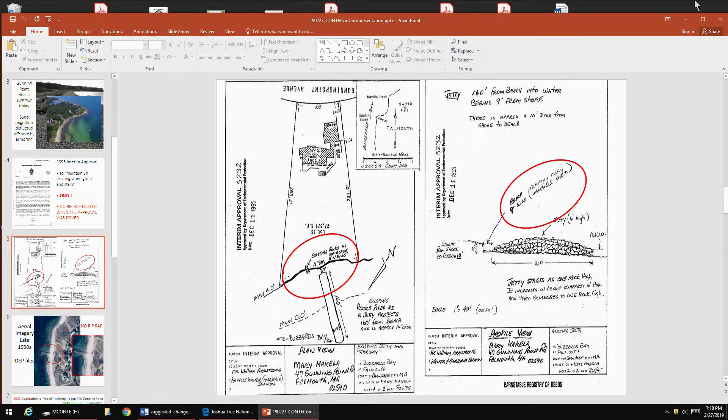If you look at the plans associated with that approval, you see a 160-foot groin and some existing rocks, giving the dimensions for a stone staircase. The plan shows the toe of that groin starts about 9 feet from a coastal bank, specifically noting intertidal, natural shore with a 10-foot bank, and it also notes the height of that jetty.

Here's the aerial imagery. I don't have the exact date, but if we look at the close-up, you can see old degraded riprap up on top, and then it turns into a rocky but natural beach area. This natural beach area extends all the way down to Flume Pond.

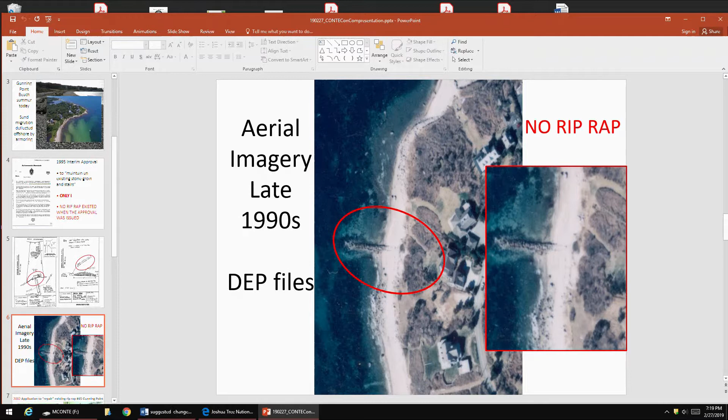In 2002, there was an application to repair the riprap on the adjacent property. There was some degraded riprap, though the existing conditions plan doesn't really show it. What's interesting about this plan is it says beach grass not to be disturbed during construction, again pretty indicative that there wasn't any riprap there.

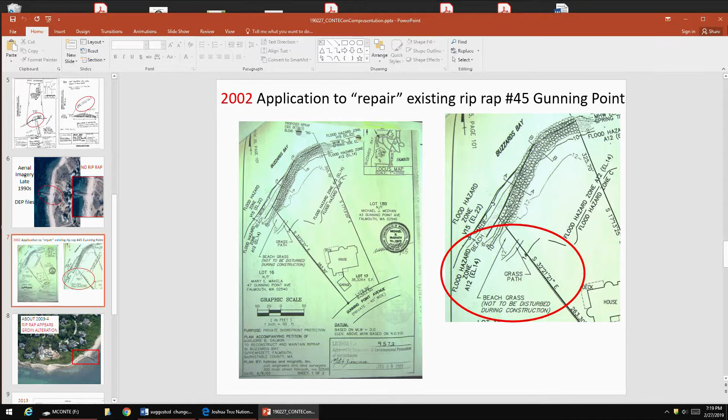What happened around 2003-2004 is this McCready mansion here had just completed riprap all along here, and they were starting other work, getting it permitted after the fact. Here's almost like a seawall going all the way here, and now during that construction it extends right into this area that never had anything.

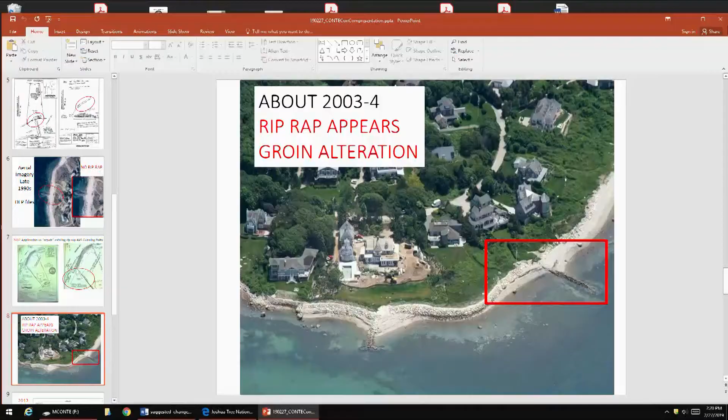We also see this groin, which started off, now extending landward. Later, around 2013, a plan was prepared for Salt Pond because they became the owner of all this coastal access property, which the Sippowisset subdivision has access to. Here's that plan, showing the area with the groin.

What you can see now is the groin, and during this plan you can see all the riprap - they even started riprapping down into here. There's this riprap extension, a change in the configuration of the steps, and an extension of the groin all the way to the toe of the riprap.

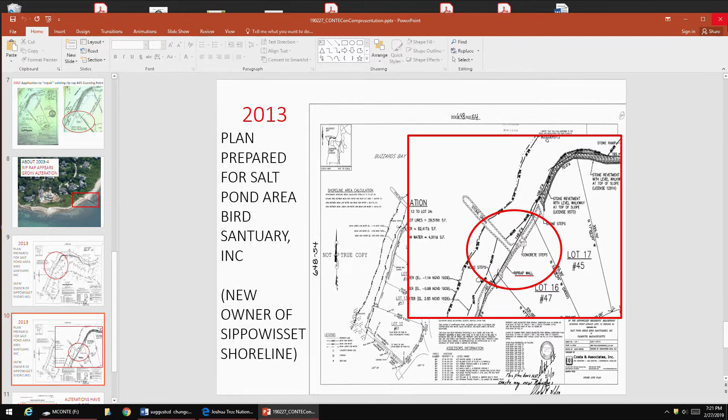The important thing is those alterations actually void the 1995 interim approval, specifically because the standard conditions say in paragraph 2 that any structural alteration requires a waterways license, and most importantly, any unauthorized structural alteration shall render the interim approval void. So not only was there no riprap, but because of alteration of the structures themselves, they voided the interim approval - there's basically no approval for anything on this property now.

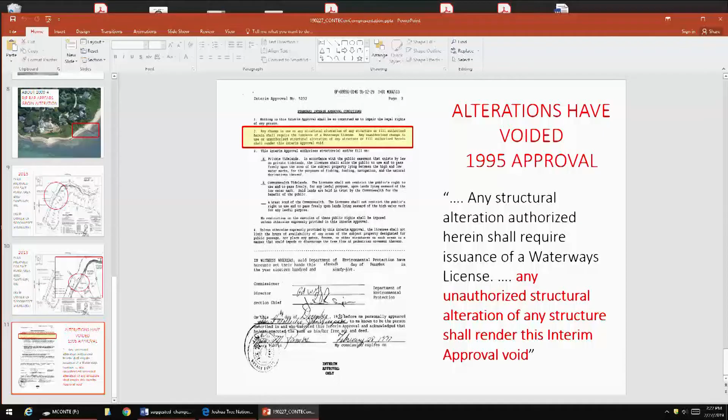I would ask that the Concom could help our neighborhood and the town of Falmouth by asking the new owner of this property to remove these structures and let this area start to revert back to a natural condition. So that's my presentation.

Thank you. Thank you. Anyone else?

Mr. Chairman, I just want to make an observation that normally, in past years, I've been on this board since 2003, when a presentation for an RDA is going to take more than 5 minutes, maybe it's the wrong place to hear this. So we should think about that. Duly noted. Thank you.

Michael Eder, I live on Gunning Point. One thing I wanted to point out is I think you have a number of letters from at least 3 long-term residents attesting that that wall did not exist prior to 2002. While I didn't stand there and watch the wall get built, we know that there was a major wall construction.

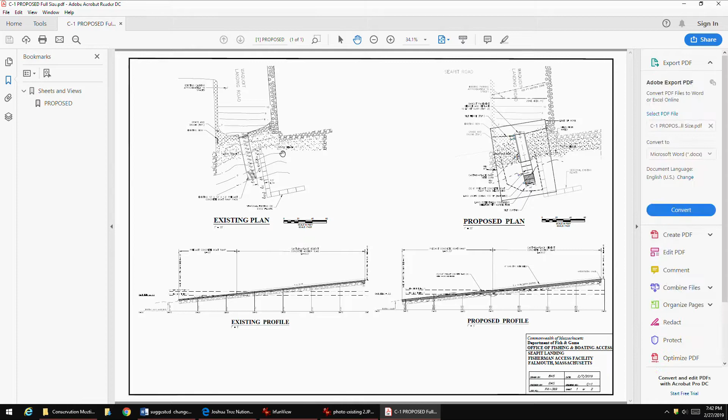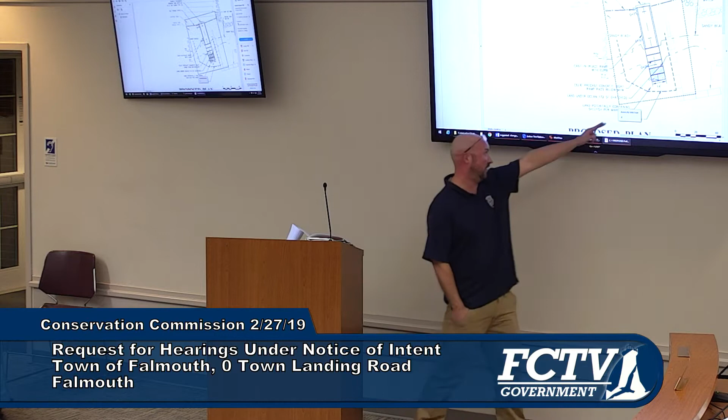So here's the boat ramp right here. There is land under ocean. We spoke with Marine Fish. The ramp will be extended by 4 feet, and widened by 6 inches on each side. The actual clear path will remain 12 feet. The 6-inch curbs will become 1-foot curbs, so the ramp will actually be 14 feet instead of the 13 feet existing. The land under the ocean, the ramp will be extended by 4 feet. The actual existing pads, which are 1.5-foot precast, will be made into 6-foot pads. The reason we do this is it seems to last longer, and grouping them gives more traction.

The extension, the 4 feet we're extending into it, is unfortunately in a shellfish area. So for that, speaking with Marine Fish, mitigation will be required. That's 4 feet by 14, for 56 feet. The time-of-year restriction for Marine Fish would also be from January to approximately May. A silt curtain will be used and would have to be installed prior to that date.

For that reason, we're not proposing to extend it beyond that. We want to keep it almost as is, with as little change as possible. So we're basically keeping the same footprint, other than extending the curbs and the actual ramp by 4 feet. That's just to give it a bit more room to reduce the big prop wash hole at the bottom. So what we want to do is extend it so there's not as big of a prop wash hole.

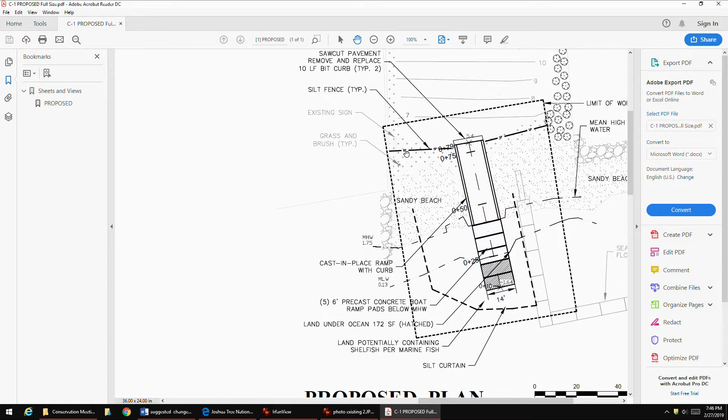Yeah, no problem. Other than that, we have used cofferdams in the past. It usually comes up. With this ramp right here, at low tide there's 2 feet, so a contractor would be working in knee depth. So what we did is we proposed a silt curtain that goes all the way to the bottom.

And what that is, it's ballast, they'll anchor it. That seems to keep sedimentation within it.

The reason we don't really want to do a cofferdam: for one, there's not that much water. Two, you're really changing the footprint on it. So when you extend that footprint into an area that contains shellfish and other things, it requires more mitigation, and there's really not much to gain in this instance.

Megansett Harbor, like I said, had a lot bigger than the 1-foot tide change, and that was done underwater. Harrington Street too, so we have done that in the past.

The total ramp length right now, we're looking at 65 feet. It's going to change to 69 feet. That's the 4 feet that I talked about.

The width, 13 feet, it's going to change to 14 feet. That's going to include a little bit of extra bank work, so you're going to extend into the bank 6 inches each side.

No salt marsh was observed. You have some brush and grass in the area, but nothing else was observed, and the silt fence is right above that area. No pavement is proposed at this time.

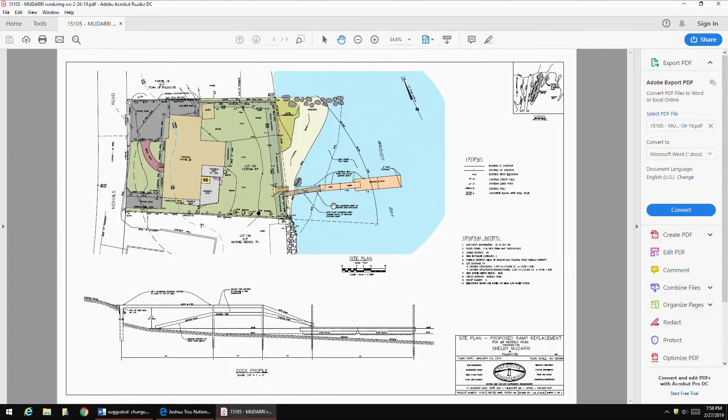This property may be familiar to you; it's been before you on a couple of occasions. Most recently, we obtained permission to rebuild the existing concrete retaining wall with a new vinyl sheet piling retaining wall, which was installed, inspected by staff, and issued a certificate of compliance. You may also remember we were before you about a year ago, plus or minus, attempting to get permission to rebuild the pre-existing seasonal ramp, walkway, and floats.

We were not successful in getting permission to do that. We reconsidered and asked for a modification of that application to allow basically what we're here for tonight again, but a lot of things have changed since the last time. So with that, I'll just go through the project.

The Mudarris own the property at Lot 148. There's a single-family dwelling and typical appurtenances on the property. They do have the benefit of an order of conditions for a seasonal dock, which received a certificate of compliance very recently. There was some controversy over its licensing about a year ago—some neighbors challenged the Chapter 91 license, suggesting it had become null and void. But ultimately, the DEP, through the Division of Wetlands and Waterways Office and Mr. David Hill, found in favor of Mr. and Mrs. Mudarri and upheld the original Chapter 91 license. So as far as we know, there are no outstanding matters of compliance or licensing with anything on this property as I stand here tonight.

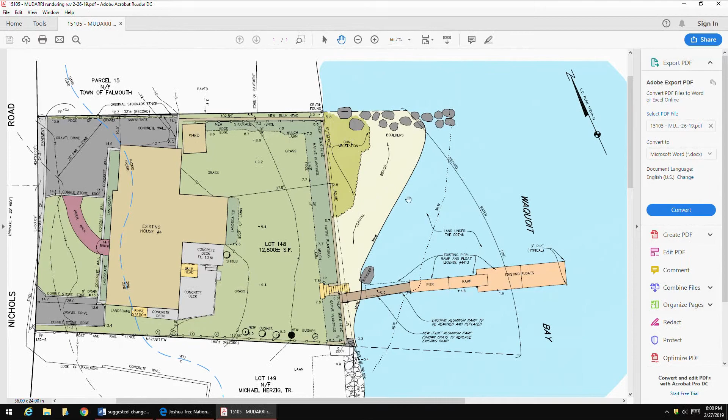I want to make clear the focus of this project is basically where I'm trying to circle with the mouse right here. You'll see a dashed line representing a portion of the licensed seasonal dock—a ramp that leads from this fixed walkway, slopes down, and lands on the beach in this location. Currently, to use this seasonal ramp and float, the applicant has to walk down this set of stairs onto the beach, sometimes through the water during higher tides, onto the base of this aluminum ramp, which grows seaweed and is relatively slippery and dangerous, then walk up the ramp onto the horizontal pier and back down a ramp to the floats. This is a velocity zone.

You have regulations that prohibit new docks or expansions of docks in FEMA-designated velocity zones. What we're hoping to convince you of is that we can eliminate this sloping ramp that lands on the beach and instead replace it by purchasing a new aluminum ramp that would connect to the same location on the pier, but instead of landing on the beach, it would simply land on top of this wall, so the applicant no longer has to walk down the stairs and up the ramp. They can instead just walk across the lawn and over onto the dock. This new extension from this position to here is basically 8 feet.

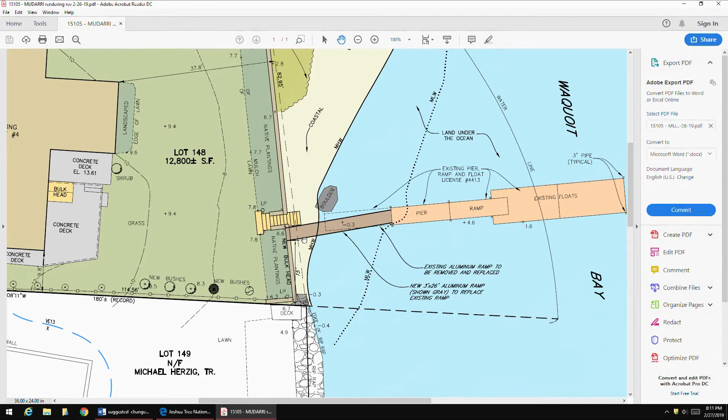Thank you. Jen? Yes, Mr. Chairman, the dock, as Mike says, unfortunately does not meet the strict interpretation of your regulations. It is an increase in the structure in a velocity zone. Mike is right, some of the issues that were in the original denial have been resolved, which is a good thing, but you still have that pesky regulation.

And I'm sorry, I do not believe that Mr. Borselli has demonstrated a public benefit with this ramp. There's public access currently. There'll be public access if this project is not approved, and this does not meet the level of public benefit.

That said, it's really up to the board. The dock does have an order of conditions. It is a seasonal structure. It's just the increase in this structure. I mean, this exact plan was denied.

What was it, in 2017, Mike? Yeah, with those denial findings. Based on those findings, though, that are no longer valid.

Well, there are other findings too, like the velocity zone one. You skipped over that one. Well, I didn't skip over it. I tried to make the point that I believe we've demonstrated there's a public benefit by the letters I submitted and how we've improved access.

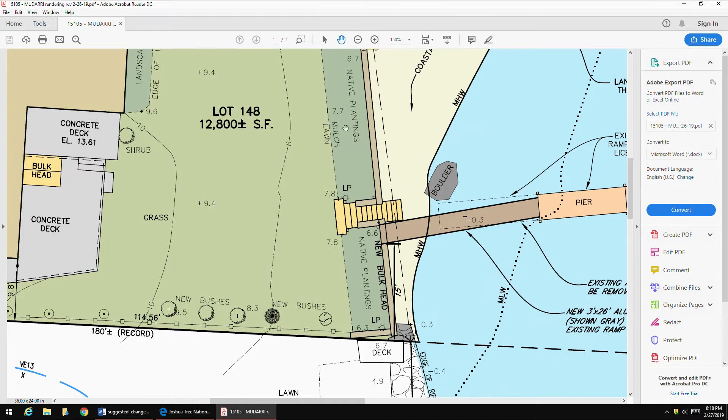I didn't comment on that, but that's a good point. Right in this location, the planting that's here, if you approve this, would have to be removed. We'd probably shift them over to this edge, an equal area, so there wouldn't be any reduction in the overall mitigation planting area. It's already wrapping up on the top here in green, so we could just thicken this corner by the amount we take out here—it would be like a 3 or 4 foot break. Those are newly planted, established shrubs, so it'd be easy to transplant them.

So we could condition that, correct? Yeah, absolutely—you'd have to do a new site plan, Mike. And this whole setup in its entirety is seasonally removed, is that correct? Yes, Little River Boatyard is under contract to install it and remove it seasonally.

I have a question, Mike. How big are the posts you have to put in to hold that ramp, and how long is the ramp, and how many posts? There are no posts, which is another benefit, because it's going to be made out of aluminum, and it's structurally strong enough that it can bridge without any supports. It's going to, you have to have some support though, right? No, it just connects right here to the pier.

Okay, go to your dock profile. I don't have it on this plan, do I? Yeah, you do, it's right there. Okay, that post right there. Oh good, that's great, thank you. If you look at this—so that first one right there, there's no post, this is the wall, now I see that—and this is the portion of the existing licensed seasonal dock. This is the first set of pipes for that.

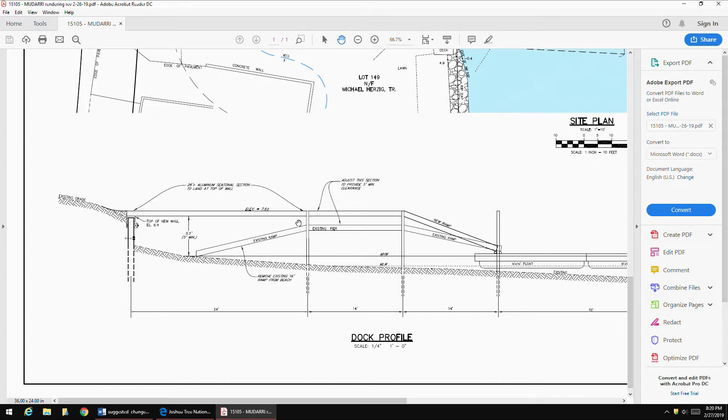So there's nothing new being introduced. It's still the same type of pipe. It's gonna sit right on the existing pipe, and it's gonna connect into this end, just like this ramp that I'm showing here does.

Thank you, Mr. Byrd. So I'll move to close the hearing and take it under advisement. Second. We have a motion and a second. Any further discussion from the board? Any discussion from the public? Hearing none, I'll call for the vote. All those in favor of closing the hearing, taken under advisement, say aye. Aye. Anyone opposed? None, unanimous, so moved. Thank you, Mr. Borselli.

Gotta get some Massachusetts plates, though. New York plates, I hate New York plates.

Next up, Nathan Holcomb, 270 Sippewissett Road, Falmouth, Mass. For permission to construct an addition, garage, mudroom, screened room, deck, gravel terrace, expanded driveway, 4-foot wide mulch path, wash station, dry wells, invasive species management, restoration, and all associated excavating, clearing, grading, and landscaping. Thank you, sir. Abutters cards have been submitted, sir. Thank you.

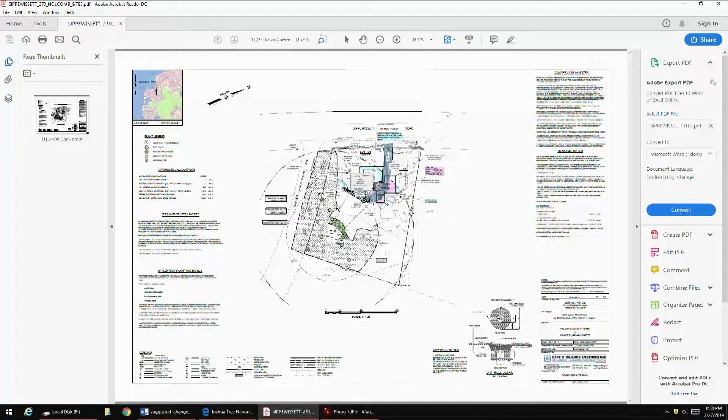I think this project has a very significant upside in the benefits of this invasive species control plan. It's about 10,000 square feet in total, compared to 988 square feet of increased coverage by the actual work in the outer portion of the buffer zone.

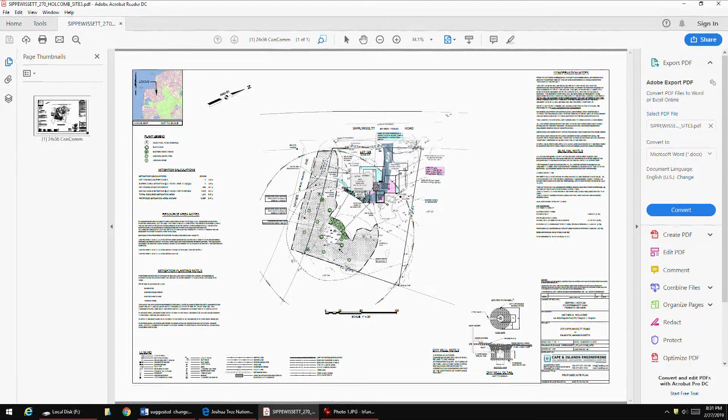I should also say that this work footprint up here, where that additional 988 square feet will occur, is all previously developed land. There's no naturally vegetated buffer zone areas up here that will be disturbed by those activities. So you have a little under 1,000 square feet of additional work in a previously developed portion of the buffer zone up here, and then 10,000 square feet of a very degraded wetland and resource area buffer here that will be restored by the project. So with that, I will turn it over to the commission for some questions.

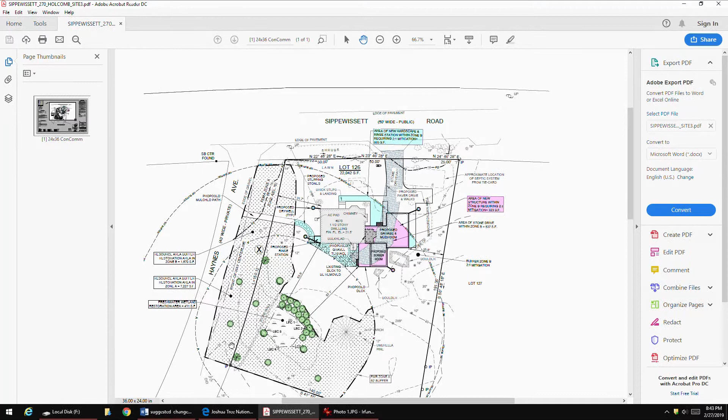The logic for us doing this - by doing this, we're increasing the size of our restoration area, which is increasing the cost of this. But because this area is also overrun with invasives, if we don't do it here, we're just setting ourselves up for a long-term management headache, because the seed bank will be there, the porcelain berry - I mean, right, it's kind of, you do it all, as you probably do at the eastern edge of the property as well, but on the abutter's side, this way, yes.

It was entirely different than most of the projects that we look at because of the water, and all freshwater wetland restoration areas are equal, regardless of how their current condition might be, and we should treat them that way. But when I was reading the proposal, I thought the meadow sounded significantly superior to the current condition.

You know, I try to visualize projects - it'll look a lot different when the meadow's in there. And I never get the house right when I visualize it, by the way. Coming down Sippowisset Road, that house that we approved - it's a monster. Anyway, focus. So I'm focusing.

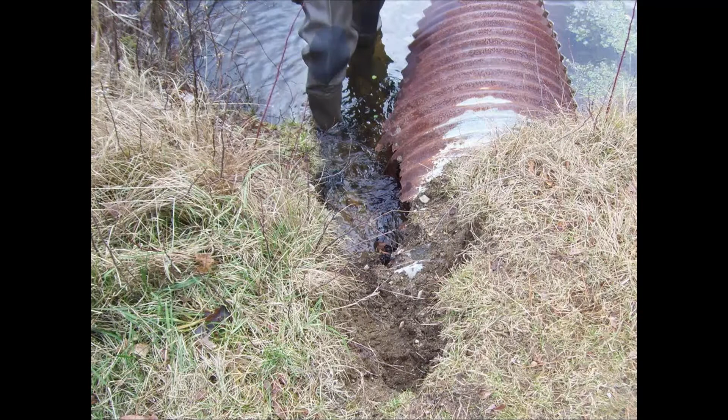And this is another view of the erosion here. You can see this whole area here was once the bank went out to the face of this box, control box, and it's now all eroded out. The downstream end of the pipe, as you can see here, is broken off and collapsed into the downstream bog. And again, you can see the erosion along the downstream side, and also where the corrugated metal pipe has deteriorated and is completely gone in this location here.

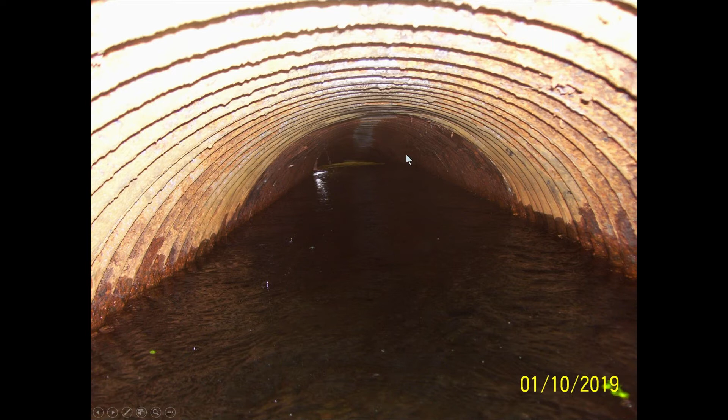And this across through here is about where this section of the pipe is broken off and has fallen into the bog. This is a view of the inside of the pipe, looking downstream from the box, and you can see there's a little bit of daylight here. That's that area that's been broken off, and further downstream, you can see where there is no daylight. That's where the pipe is submerged down into the water.

So what we're proposing is to replace the existing 30-inch corrugated metal pipe that's located here. This is the access road coming in with a 24-inch plastic pipe. And the reason that we've asked for a few continuances is to look at some alternatives from when we first started with the notice of intent, which was to dig this out and replace it with a new pipe.

The current proposal, the revised proposal, is to insert a 24-inch plastic pipe from the downstream end up inside the existing pipe, that way avoiding any excavation in here, and sealing it off at both ends. So the plan is to insert the pipe from the downstream, push it up, and up in the box area here, extend it about 18 inches beyond the existing pipe.

So when we get to the graded structure at the upstream end, we'd push the pipe up, and then on both the upstream end, this is the box here, as well as the downstream end, we'd have to break off the existing section of that CMP that's deteriorated. We'd install a grout concrete collar on both ends, and that will seal the pipe into the existing pipe. So the current pipe is 30 inches, and the new pipe would be 24, so we'll have about 3 inches around, which is basically about the width of a brick, to grout around and seal it in.

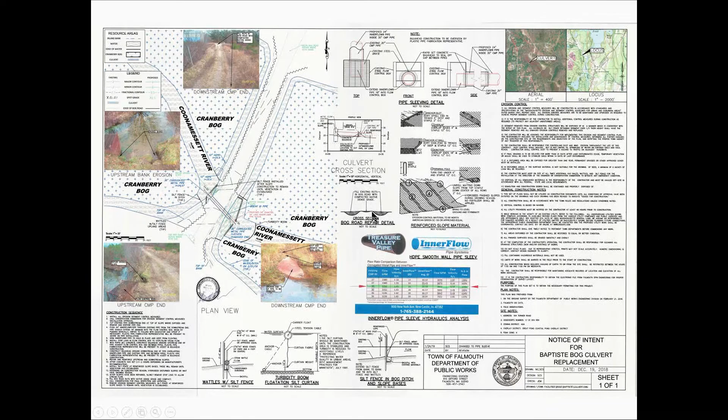So the resource areas we're impacting - this hatched area here is the work in the buffer zone, which is repairing the existing cart road. The cart road is rutted out, so we're proposing to install dense grade in the ruts and level off the existing roadway, which would be an improvement to the road in the buffer zone.

I think I've covered the extent of the project. This is what some of these installations look like.

We had a representative from InnerFlow Pipe Systems come out and look at the site, and they'll be on site during construction to assist with the installation. The expectation is that it takes a few hours to push this pipe up.

If it's needed, you can wrap a chain around it and use a machine from up on the graveled road to pull it through, but the expectation is that two people in the water on the downstream side should be able to push it up through. That's one of the ease-of-installation benefits that's made this an attractive solution.

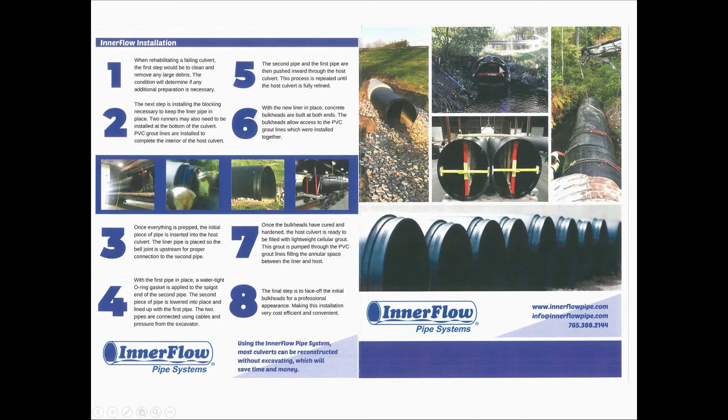In the event you have a long run, they have these small areas where they pump the grout in. In our case, which is going to be a 3-inch gap all the way around, the intent is to do it by hand, and the whole thing should take about half a day to finish.

On the upstream side, what we would do is install the stop logs, which will allow us to work in this area, install the grout on the pipe that's going to extend out 18 inches beyond the existing pipe, and then we'll be able to work relatively in the dry - same with the downstream, because we'll have the water contained. Like I said, it's basically about a half day's work, and the grout cement utilized is a quick set - an hour or two to be fully functional.

And that, I think, is it, and I'd be happy to answer any questions.

Won't that pipe rust on the bottom? Well, the new pipe is plastic, so I wouldn't expect that'll rust, and we're going to be grouting it in on both ends. I think this box structure here is pretty stable, so I don't think we'll have an issue with that end of it for sure. And the other end will be basically supported at the downstream end by the existing stream.

Thank you. Jen? Jim, what's the life of something like this? Oh, the plastic pipe? Easily 50 years, easily. All right. What rots around it that's going to matter. I know, that's the issue.